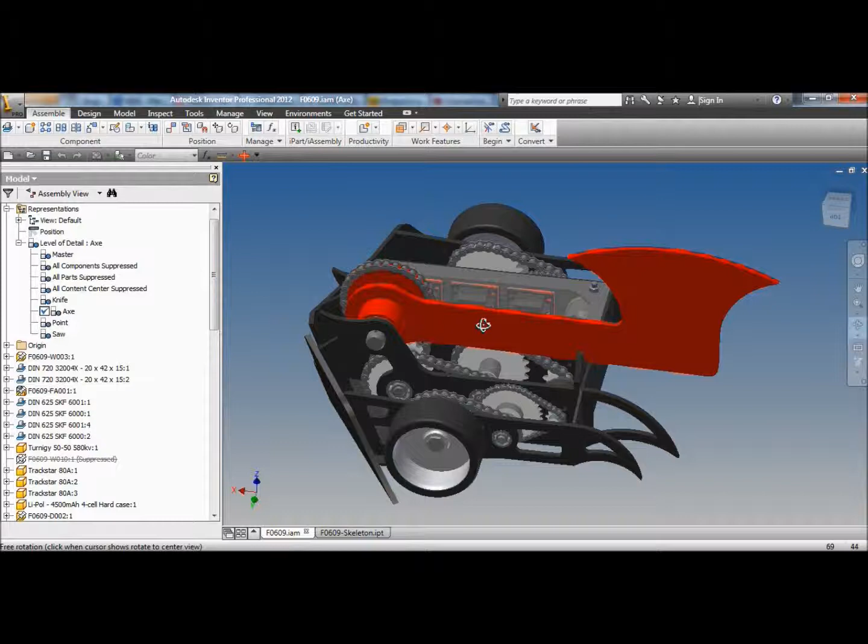Okay, I'm going to start drawing a power switch for my new Avenger. I'm going to do a switch similar to what I used previously, but this time I'm not going to make it out of cardboard. I'm going to use a 3D printed body, so you better draw that up. I'm not entirely sure where it's going to go in the robot, but you might as well draw it first and then figure out where it will fit later.

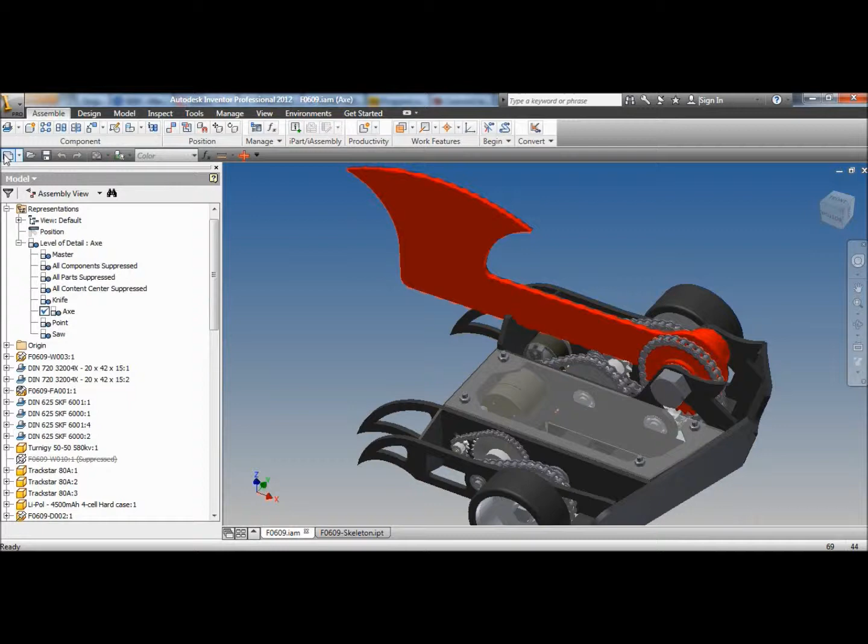So the first thing I am going to do when I draw my new switch is create a new assembly. I'm going to drop in some content parts which I know I use. So we need a screw to go through to turn the switch on and off. There's a screw. There we go, there's a nice screw.

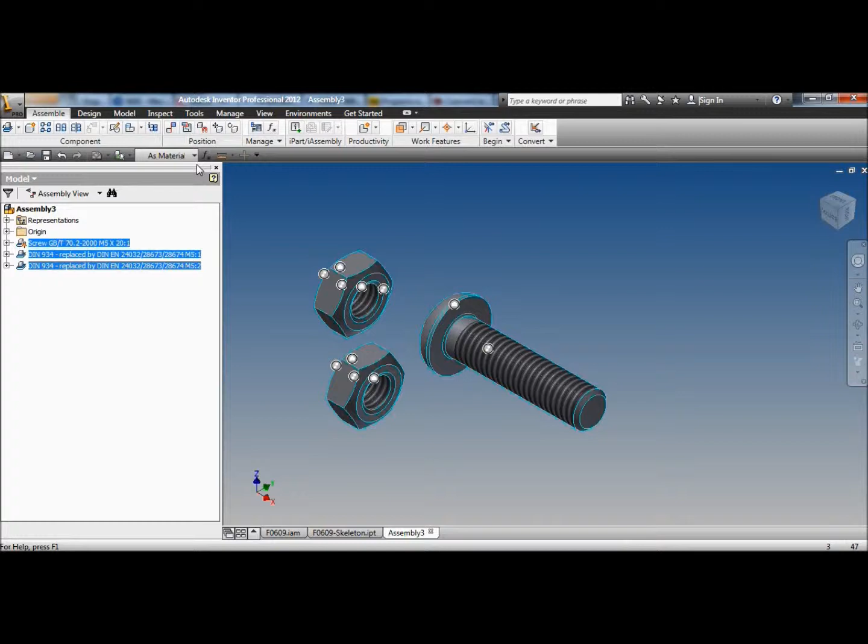I suppose I need some nuts. I need some nuts in the model. We want 2 nuts. Just for the fun of it, these look like steel nuts at the moment. I want brass nuts, so we'll just highlight that material property. This will change the appearance, different colours. Oh, there's brass. There we go. That looks like brass, dirty brass anyway. Okay, so there's my 2 nuts and my screw.

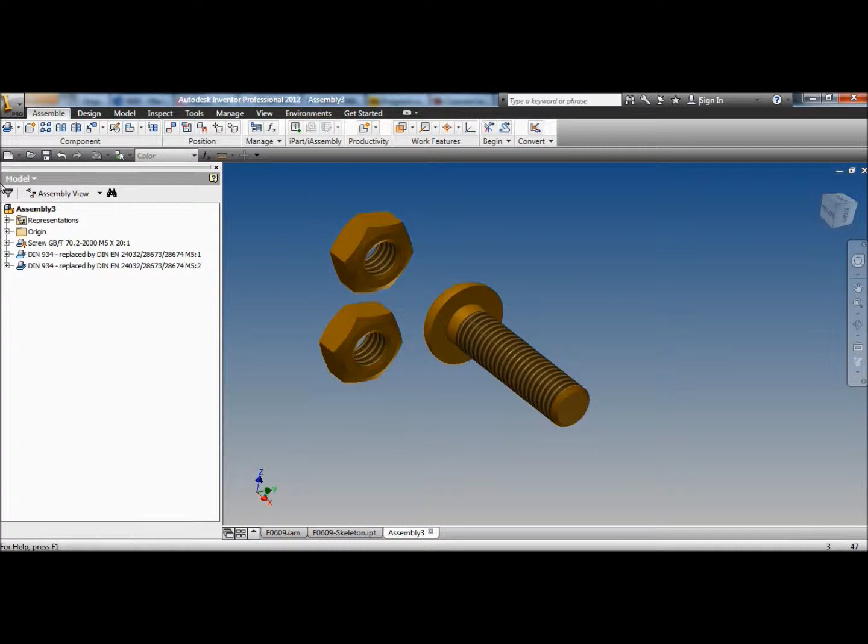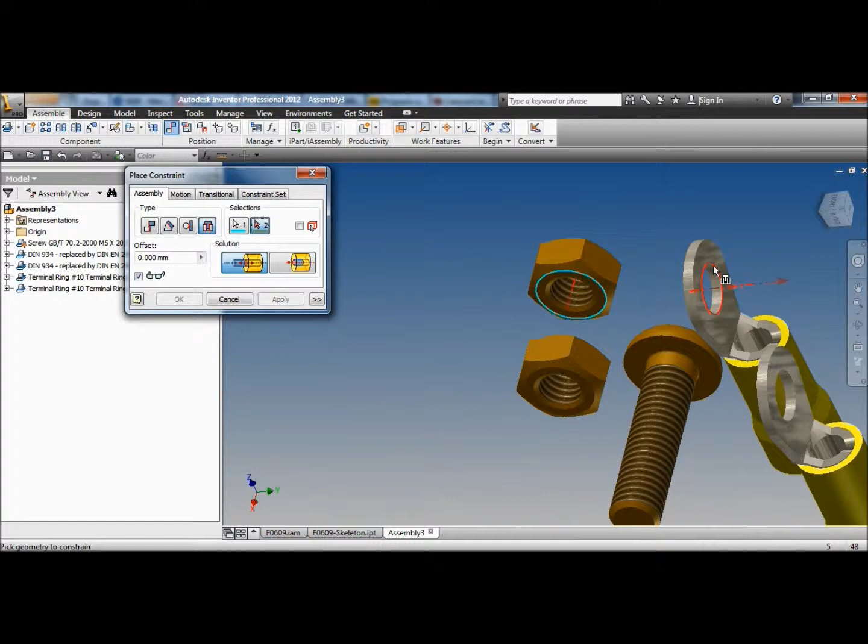And we'll get some ring connectors. So that's what my switch is made out of. So it's a nut, I can almost put it together at the moment. We'll insert my nut onto my ring connector. Pop. And this one inserted onto the ring connector. Pop.

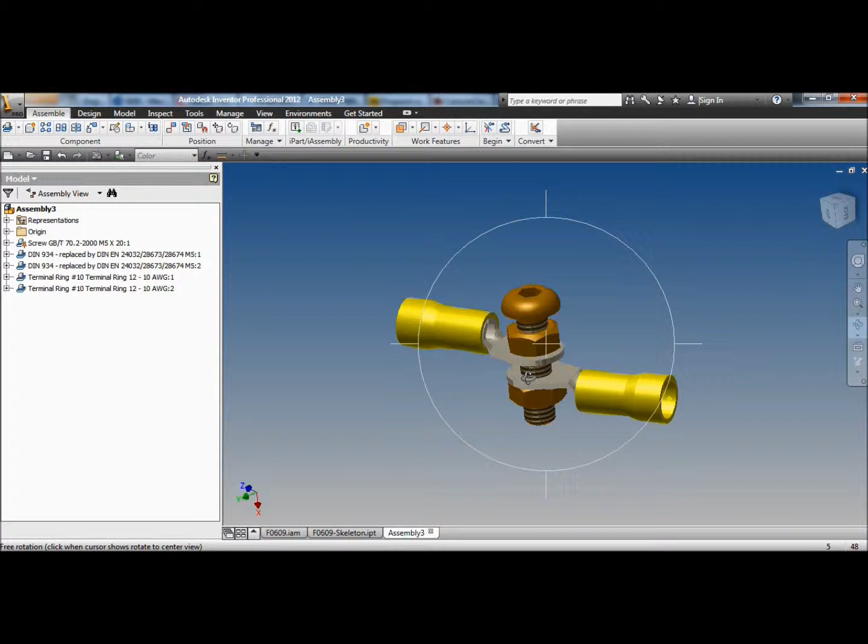So when I made my switches, I soldered my nuts onto my ring connectors, and that was hot glued onto a bit of cardboard through the middle, so when you took the screw out, the switch turned off. But I want to do a 3D printed body so I can actually bolt the thing to the robot. So what I'm going to do with this little assembly is take a few measurements for the ring connectors off it,

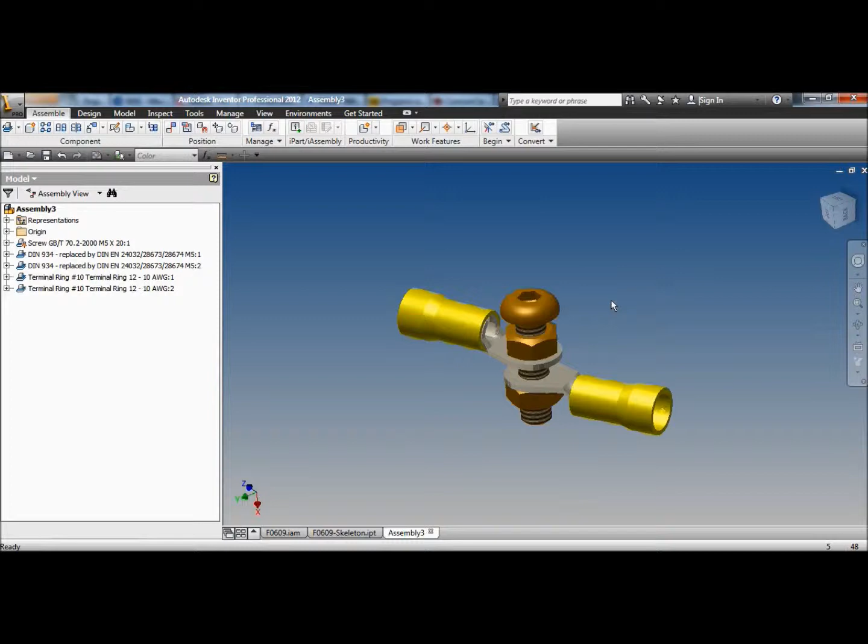because I don't actually have any ring connectors anymore, I used all mine. So I'll take some dimensions off the ring connectors and then put them into a new part. So we'll create a new part.

What I need to do here is create new parameters. Here we go. So we open the parameters, and what I'm going to do is create a new add numeric parameter down the bottom here, create some new user parameter, and I'm just going to put in some of the dimensions for the ring connectors and screw sizes and stuff, that way I can keep track of it all.

Okay, so I've just added in a few more parameters, which are dimensions I think will be useful. I know the length of the screw, the height of the nuts. There's a few of the ring connector dimensions which I'll have to measure. So, excuse me while I do that.

Okay, now I'm going to add in a few dimensions which are going to be useful on the Avenger assembly and probably other robots' assemblies, because I might use this switch in lots of different robots, so it'll be handy if I have some mounting bolt dimensions.

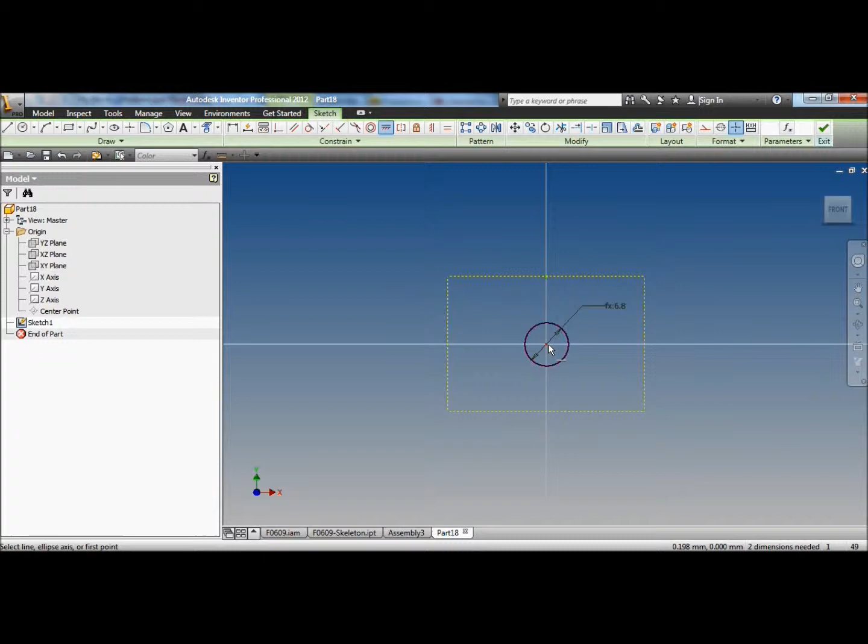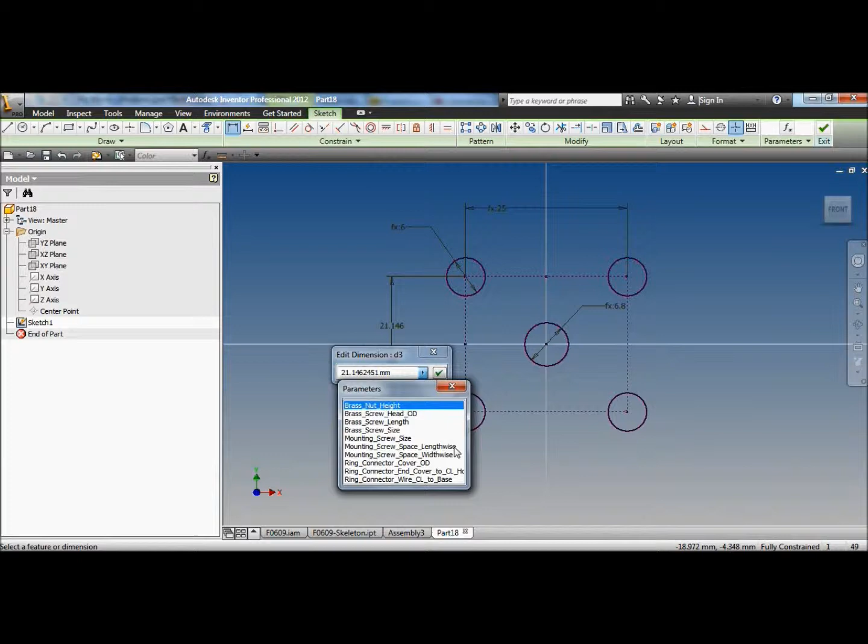Select parameter, mounting screw size plus 2 for clearance. There we go. And we'll do mounting screw space lengthwise, and the parameter for mounting screw space widthwise. Finish. So that's what the top of my screw, my on-off switch would look like.

And I'm actually, instead of extruding straight off that, I'm going to do another sketch straight away. Just because I can, this is how I like to draw. I like to do a couple of sketches first before I do a projection, just to make sure that I get everything right.

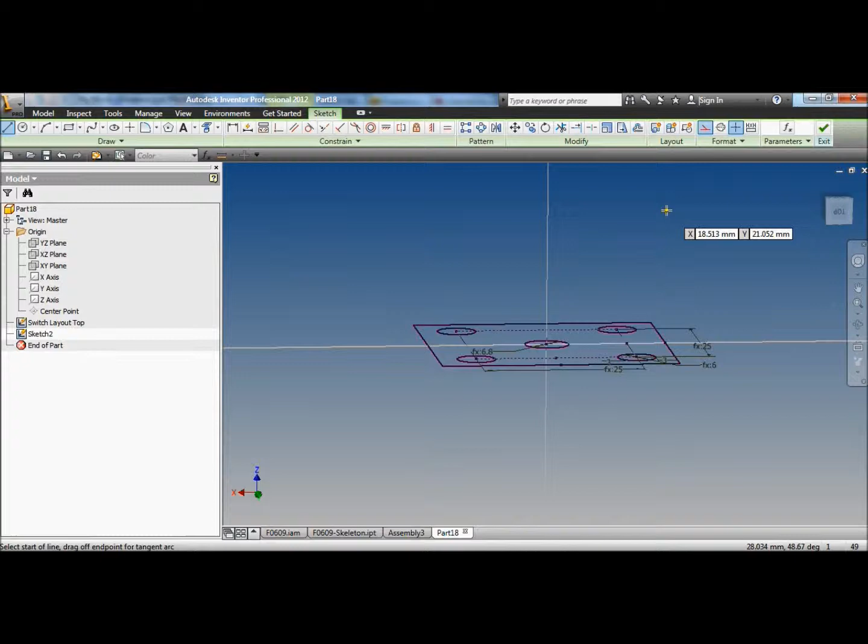What I've just drawn in construction lines is basically the dimensions I took off the ring connectors: the outside diameter of the plastic cover, the center line of the wire to the base, and the length of the plastic cover to the center line of the wire. These are things I want to work around because I want to make sure there's holes around the ring connectors so they fit in nicely into the switch before I hot glue them in. So I've taken all these dimensions off.

We might make the whole block of the switch higher than the top of the ring connector. That way, if something presses against the bottom of the switch inside the robot, like if a battery breaks loose and whacks into the bottom of the switch, we won't whack into the ring connector, we'll whack into the actual body.

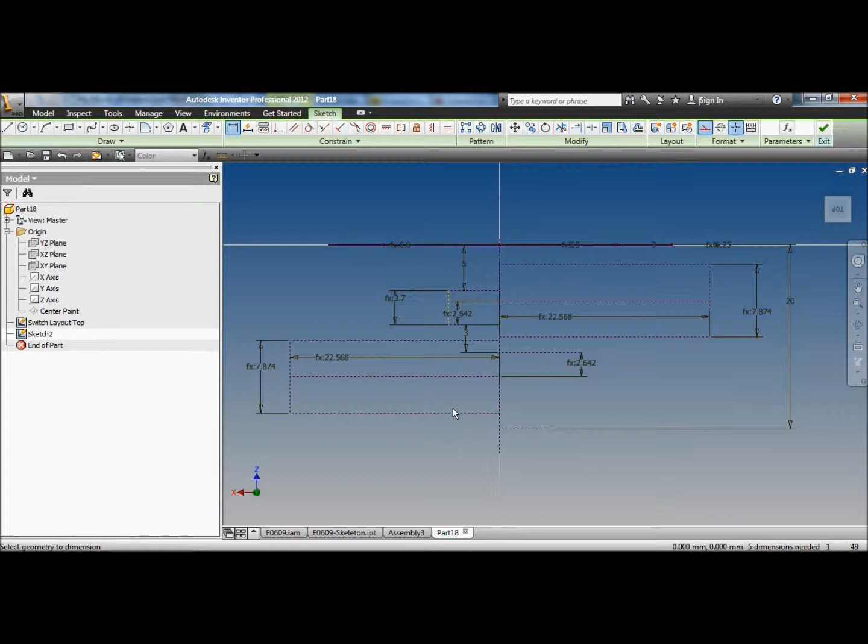Yeah, I've also realised I probably need another parameter off those ring connectors, the outside of it, so I know it fits in snug.

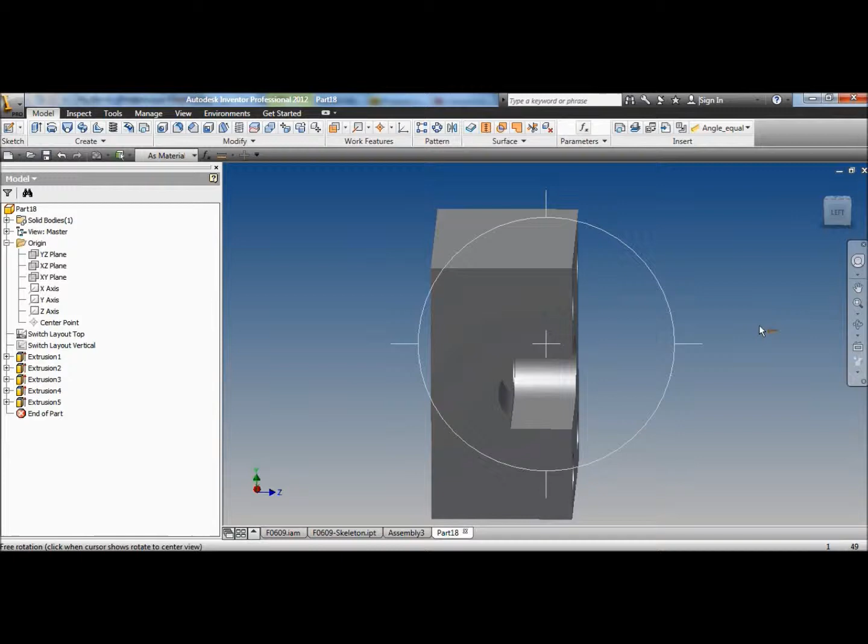Alright, so that's what that looks like, top and bottom. So it's basically just the ring connectors in a block, nicely protected. What I probably should do on this one is put a little cover on the top that goes around the outside of the brass head nut. That way the brass head of the nut, because it'll be live when it's turned on, we don't want it touching the chassis.

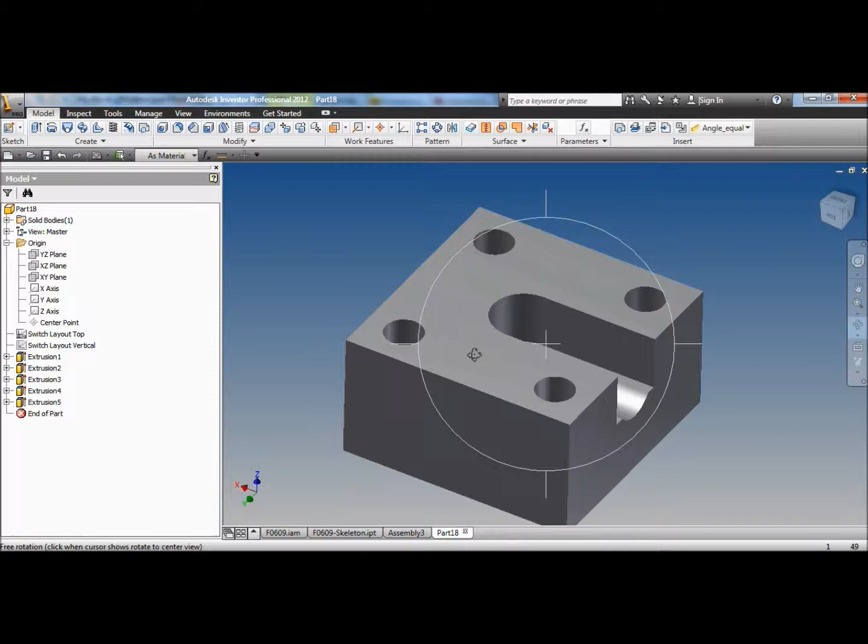So we better extrude up a little cover to go around it. That's what a little switch would look like, a little 3D printed bit. A lot of plastic in there. We could probably lighten it, but it doesn't matter.

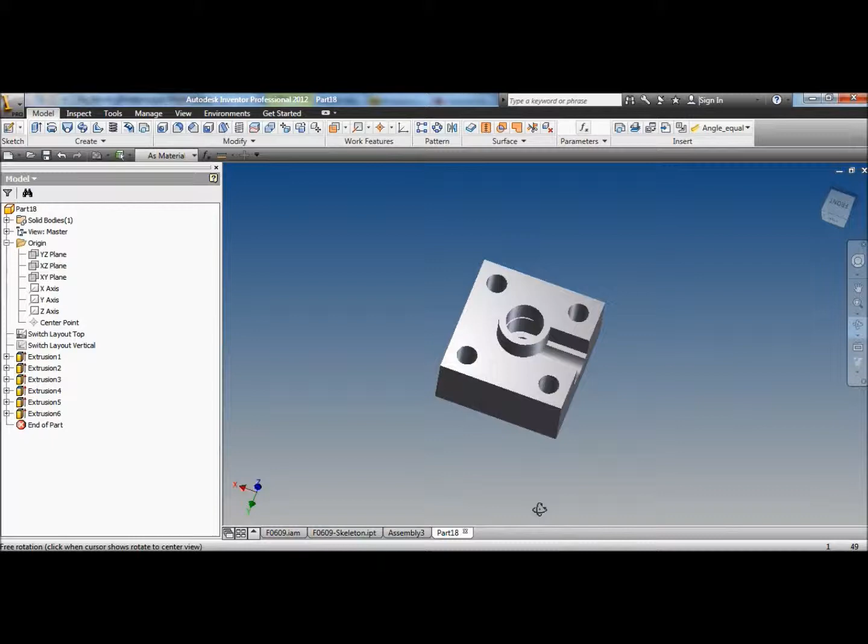Wonder how much it weighs. Go to properties, physical, we'll change the material to, let's go nylon. Yeah, we'll go nylon. 24 grams. Apply. Oh, let's change white. Sexy white nylon. Yeah, that's kind of a disturbing thing to say.

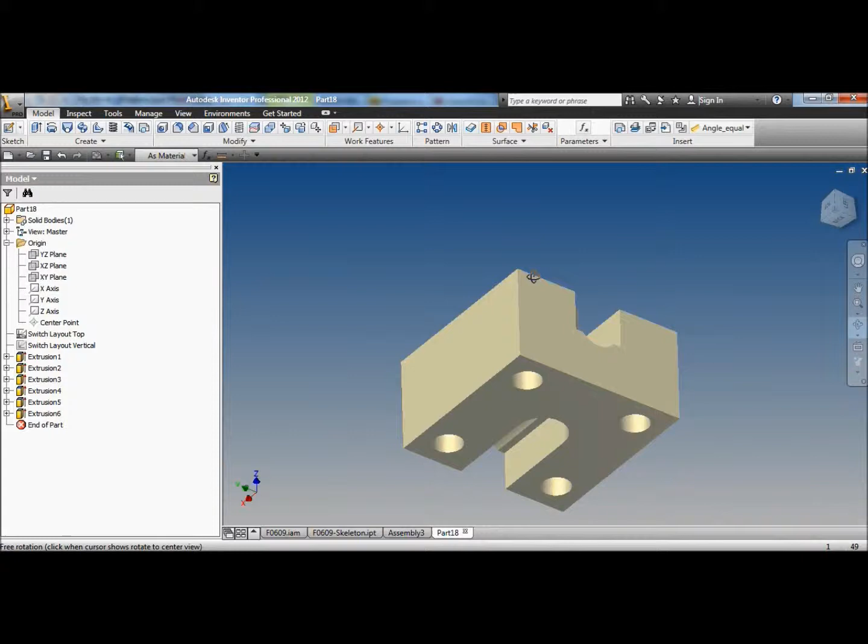So, actually, when I draw this on the robot, I'm going to have to know the outside of that. So we'll go back to the sketch. Edit sketch. We'll add a dimension to the outside. It chucks a wobbly because that will make the sketch over constrained. I say accept anyway because screw you, computer. Tells me the outside diameter of that one is 15 mil.

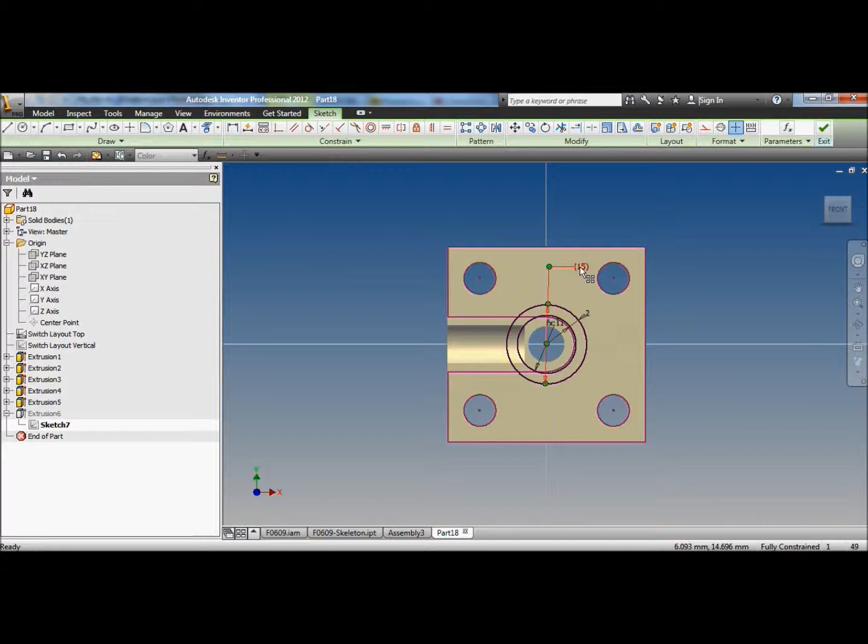Okay, so if we look in parameters right now, if we scroll down, it's added in a new column here called reference parameters, which is that 15mm dimension, which we're not allowed to edit.

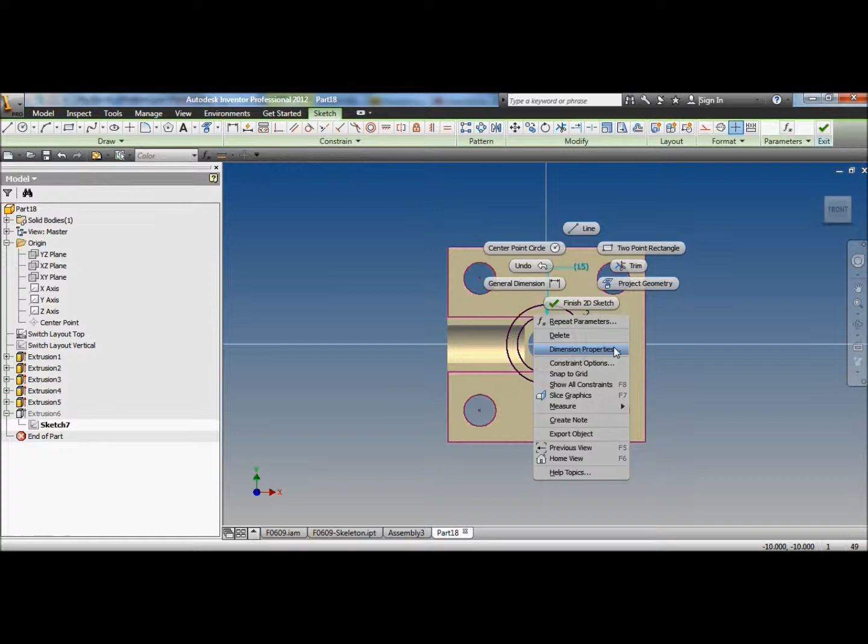So if we right click on that dimension, dimension properties, the name of that dimension is D35. Now we're going to change that to switch something. I don't know what to call this. Brass screw protector, wrong spelling, it'll do. Brass screw protector OD, the outside diameter of the brass screw connector, protector, whatever.

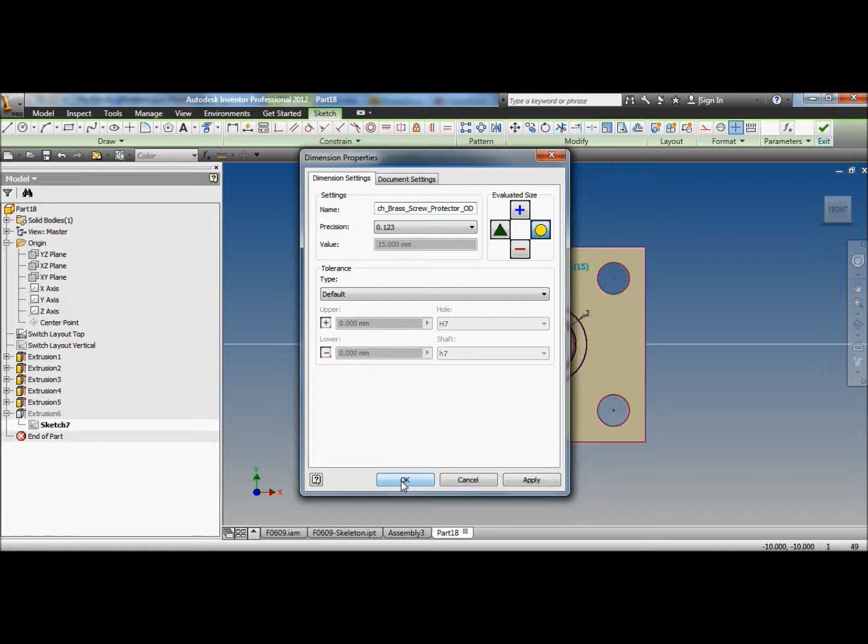Okay, apply, done, finish sketch. Yeah, if we look in parameters again, yeah, our reference parameter is now brass screw protector OD. We can probably change the name there, but we want also to click on and change the dimension properties and change it there. But I know that I want to use that parameter in the other dimension, in the other models, so we better name that one and keep it.

And the reason why I do that is because if I decide that 8mm head on my brass screw is too freaking small, then it's not going to work. And it actually should be 9mm if we change that. Done. We update, and that gets bigger. The reference dimension increases to 16 mils, and that 16mm will be transferred into other models and hole sizes will be automatically updated. Change back to 8 because I know it's 8 because I've got the thing sitting in front of me.

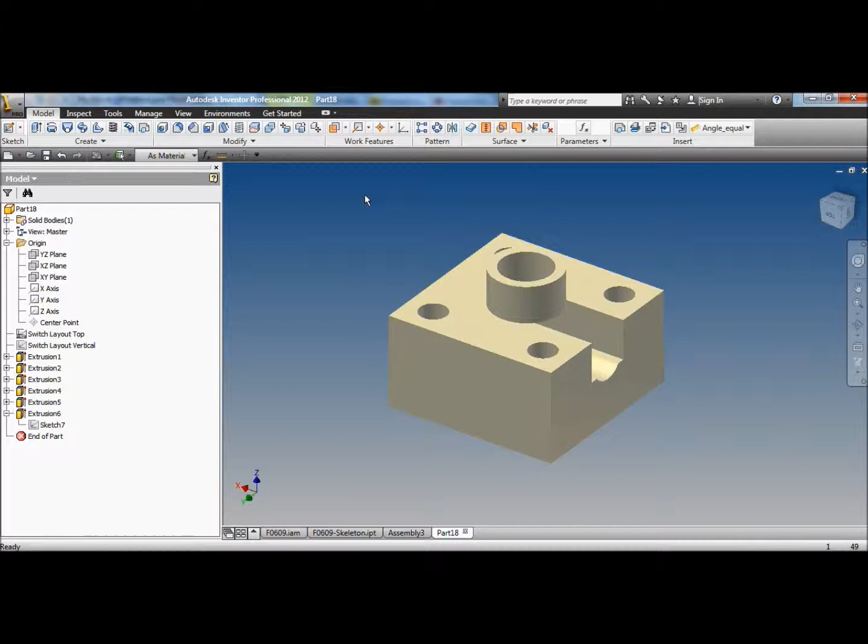Yeah, that's what my little switch would look like. We'll save that. I have a nice little common parts folder which has all sorts of wheels and batteries and valves and all sorts of junk. We'll save that in there.

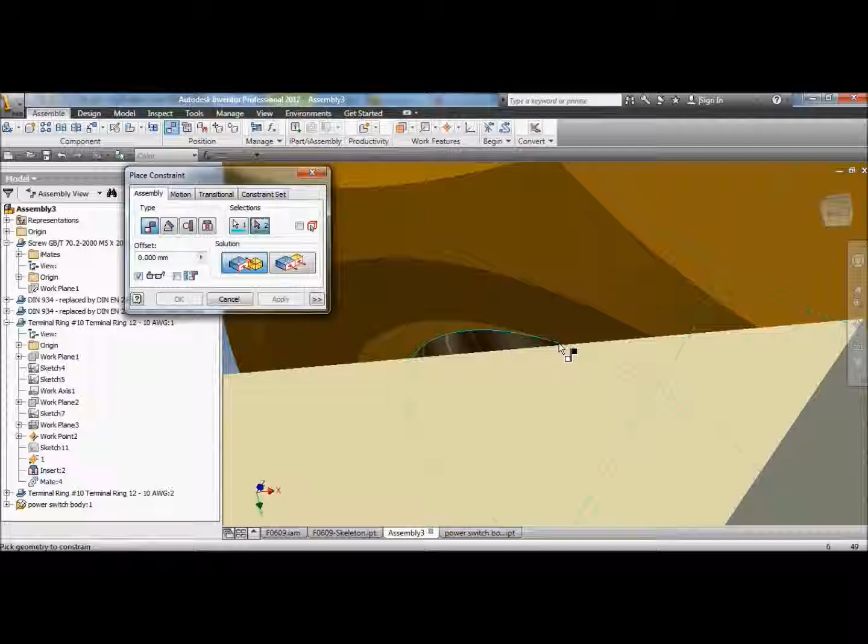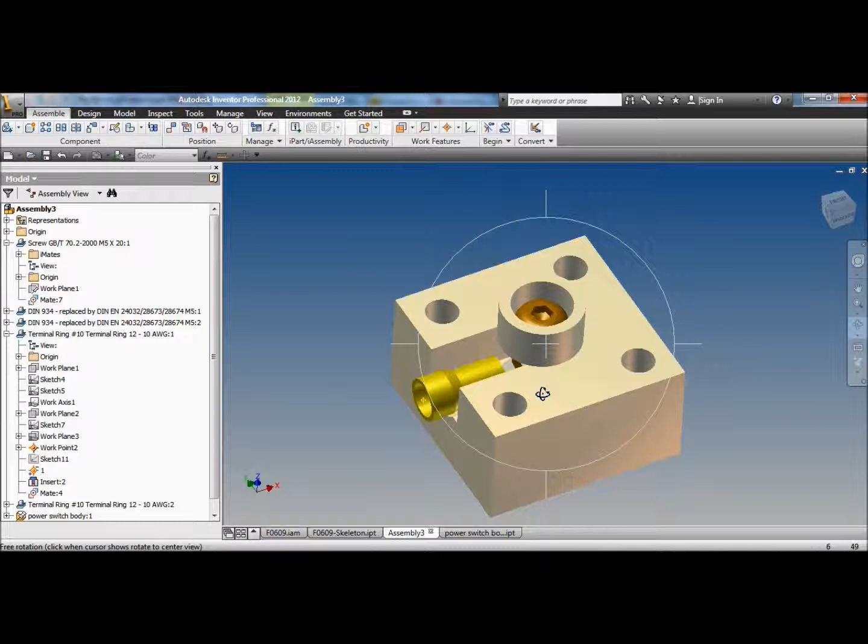Okay, that's what my power switch would look like. So basically, yeah, nuts soldered onto ring connectors. Then you put them in there, put the screw in, run some hot glue over there. It helps if you have the screw through before you hot glue it, that way you know the threads are going to line up and everything will sit right. And then that would bolt into the robot. Yeah, that's all sexy. So yeah, that's how I'm going to do my brass switch, my on-off switch for my robot.